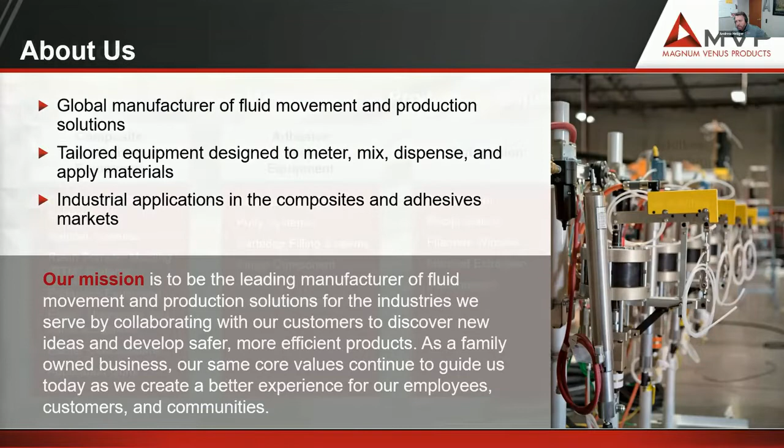Some of the products that we deal with today at MVP are broken up into 4 different sections. We have our composite application equipment, which you'll see with a lot of marine manufacturers and tub and shower manufacturers, where it's choppers and gel coaters where the materials meter mix, and you're having glass deposited out of a chopper and sprayed onto a boat. So we do a lot with that. That's our core part of the business.

And then we have our adhesive and sealant equipment for all types of bonding. And then we have our automation, where we do filament winders, impregnators, automated reciprocator panel lines, to full custom jobs, engineered solutions for customers that we've done quite a few of.

And just in the last 5 years or so, we worked closely with Oak Ridge National Lab in development of a reactive additive manufacturing system, which is printing thermoset materials. Like I said, we've worked with Oak Ridge a lot, and also Polynt Composites a lot. They are actually the material we use today. So a little bit of difference. My coworker Mike likes to always use the analogy of pancakes versus butter.

A little bit of the difference is, as you all know, with thermoplastics, you'll see a lot of those printers out in the field today, but the process with that material is basically you heat up the material to melt it down, you deposit it, and then it cools off and cures, and then if you ever heat it up again, it could go down to a liquid form.

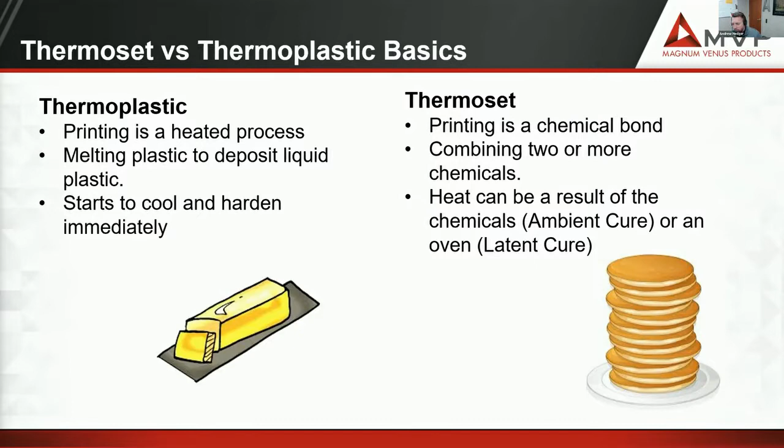I'm not going to go through the whole list here of the benefits we see with RAM, but it's about affordable tool production, a lot of time savings with production and prototyping. A big thing that we like to say is your CAD file is your master mold. You don't really have to build a master mold if you don't need to. You can store your CAD file in your computer, and all you need is a step file to go through the slicer and begin printing.

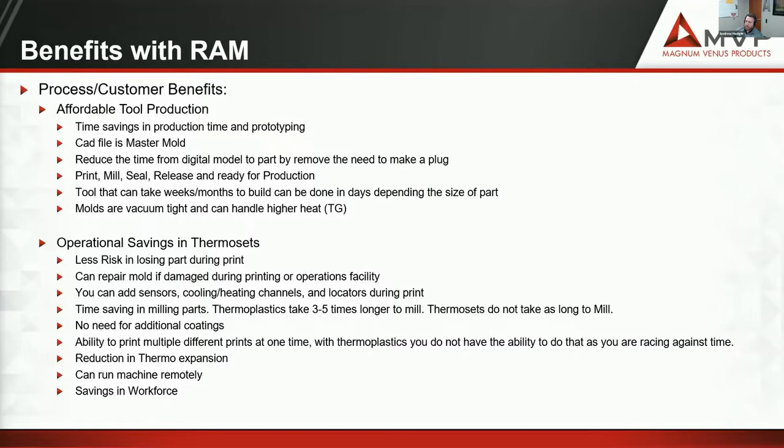Obviously, we're printing, milling, and then not really putting many coatings on, maybe a sealer and a release agent, and then you're ready to rock and roll in production. Some of the operational savings in thermosets is there's less risk in losing your part. We'll get into this a little bit more. It's about the open layer time that you have, because we're printing at room temperature. We're not heating this material up, and we don't have a heated table or a blower on it.

It's all being done at room temperature, and these materials are meter mixing together at the gun head and deposited out. And when they cure, the gel times can range from 15 minutes to 30 minutes. It builds that stability, and we're stacking off of those beads.

So some of the advantages of printing thermosets is, again, the chemical reaction between the two different materials is building a much stronger Z layer strength than you see typically in thermoplastics today, because you're cross-linking these materials, and as they're curing, they're bonding together. There's a reduction in thermal expansion, and some of these materials have isotropic expansion. So depending on what your end use cases are, there's different materials that work for different products.

The biggest flexibility, as you'll see throughout this presentation, is the open layer time. That's probably one of the major advantages to thermoset printing. You have the opportunity to print through previous paths on this machine as well. So you don't have to go bead side by side. You can print through the previous path because it's still in liquid form until it cures.

The thing that's nice too, it's easy to repair. When we print a mold and put it into production, and say a forklift comes by and hits that mold, or we drop something on the mold and it chips, we can use the same material to repair and bond that mold back together and have it back up in production. So it's very easy to repair. It's durable, it lasts a long time, and then we have unrestricted build dimensions.

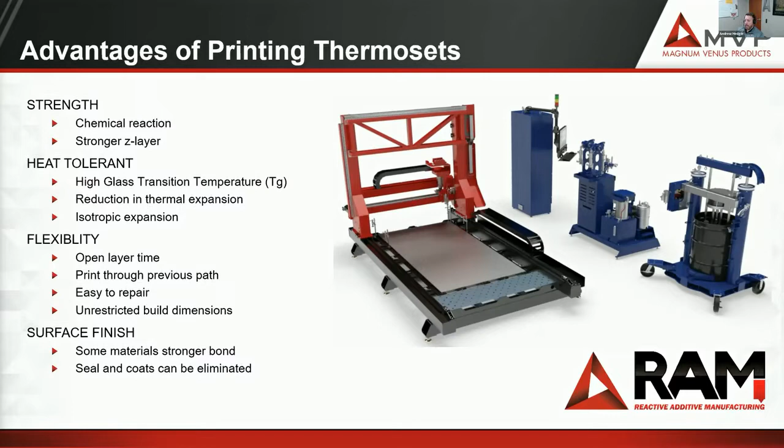Also, for surface finish, we have different nozzle sizes that we go down to, close to 1 millimeter almost, that we're testing on our nozzle sizes for what our print beads could be.

This is a little study that Oak Ridge did with the machine, looking at energy efficiencies. We were one of the most efficient energy machines that they had at the Oak Ridge National Lab. Compared to the floor BAAM and floor FDM systems, we were pretty significantly more energy efficient than all those other machines.

That's because we're not using all those heat sources needed to heat up these materials.

This is our large scale RAM, pictured in your right hand corner. It has a pick and place system on it. We can do secondary bonding, and it has a removable print table. On that machine, the print table is actually moving in a Z direction, and when you need to remove parts, you can remove the whole table or remove it in 4x4 sections.

So a great opportunity here, as you see in this picture, you have 3 different parts that were printed. They were all printed at the same time, and we were able to do that due to the open layer time. So if we wanted to print one mold and pull it out, we could print another one, or print all 3 at the same time.

In thermoplastics, you'll have a tough time doing this because you're racing against that bead you're putting down. Once it starts cooling, you won't get that bonding in the Z direction like you normally get in thermoset printing.

That's something Oak Ridge did. I think there's a table we printed in 3 different sections for one of the shows, but it's just showing you what you could do with that open layer time.

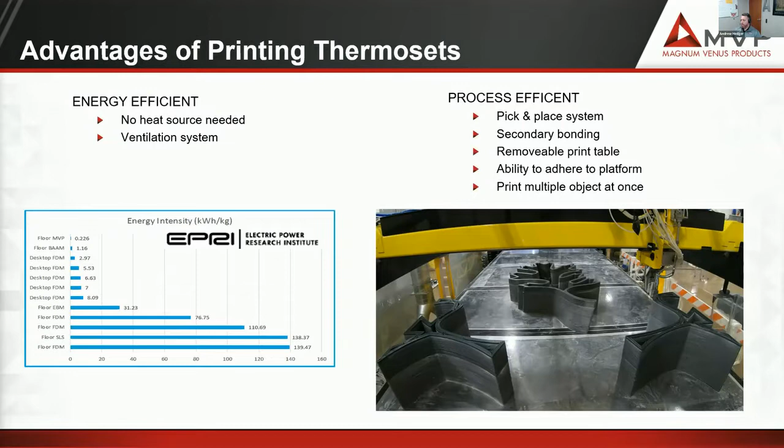These are the 2 different machines we have today. The one on your right is the large scale, 8 by 16 foot with a 3.5 foot print height. That is the machine that's at Oak Ridge today.

And then we have our 4 by 8 machine at our Knoxville facility that we're currently setting up and getting materials pumping through the systems. We actually just recently sold one to Mississippi State, and they'll be working with us in development and also printing parts for customers in the near future. I think we're looking at sometime in February for delivery of that system.

But as you can see, we're seeing a lot more demand going towards the 4 by 8 size with the 4 foot height print, because it's scalable, like I said, in those sections lengthwise. And it's a little easier to access because the table isn't moving up and down. We can take the table and remove it, put a pallet or a different type of table, wood, carbon fiber, or aluminum, and print on that, so we can mount different types of sources to print on top of.

We use a Siemens control package on this machine as well, and we use open slicing software to transfer our CAD files into print files.

Like I said, we have a great partnership with Polynt Composites, who we've been working with tremendously through this whole process over the last 5 years. We actually started with one general purpose PRD 1520 material, and they're now offering more materials.

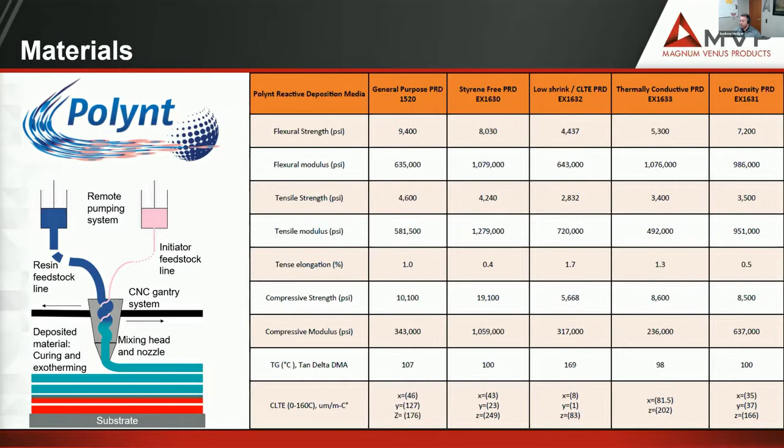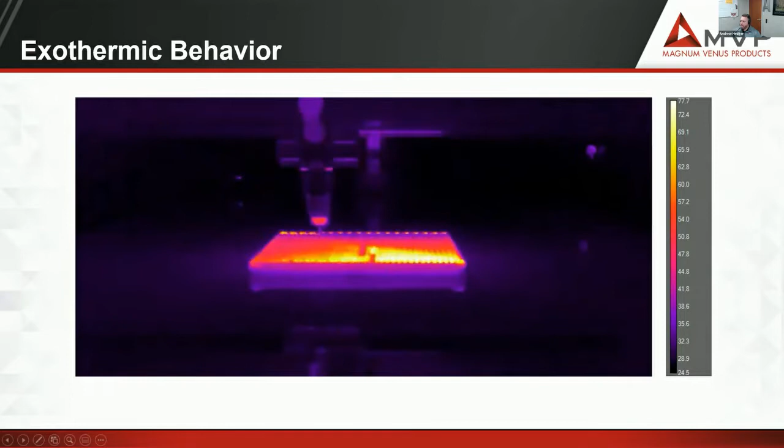I think this is actually a kayak mold, a paddle mold that we printed here, if I'm correct. It was at the CAMX show a couple of years ago. So it's pretty cool seeing how the heat follows up the print layers. I think about 5 to 7 layers down is when you're tapping into the materials and it starts curing.

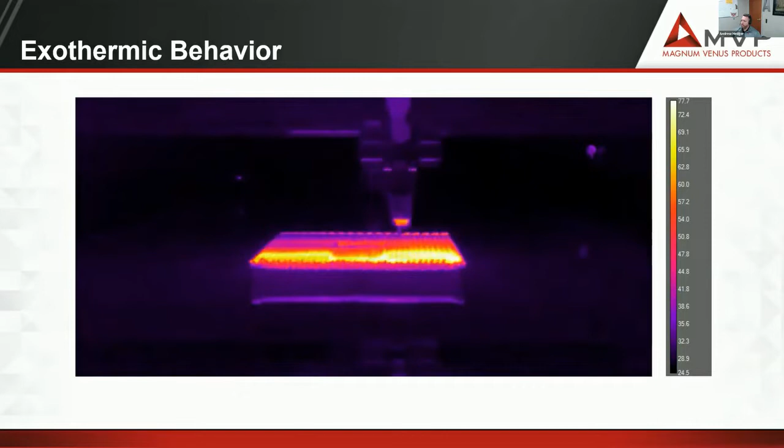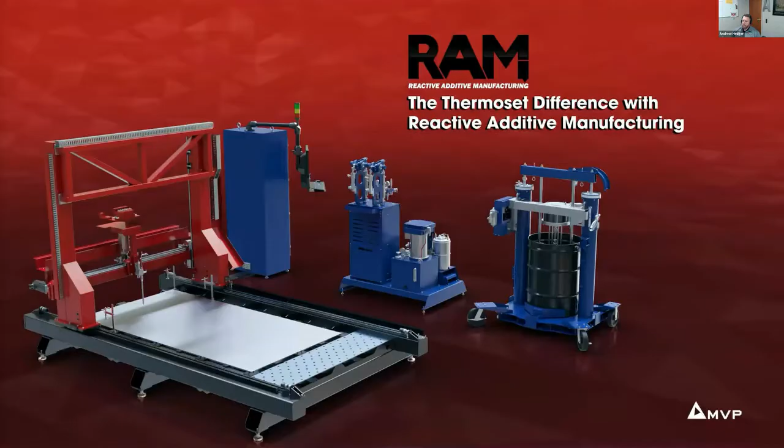And this is another video. You're not going to hear any sound on this - I had technical difficulties trying to get the sound to play through - but this is our RAM system. We launched this video at CAMX. This is a small scale 4 by 8, and you'll see on this the print through that happens, and the pick and place that you could do.

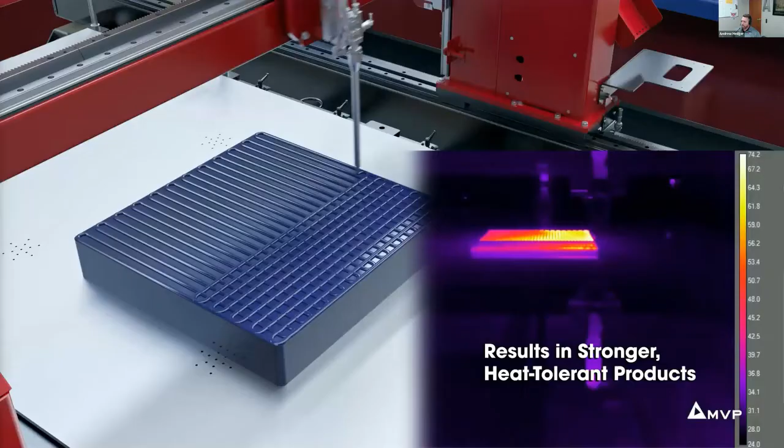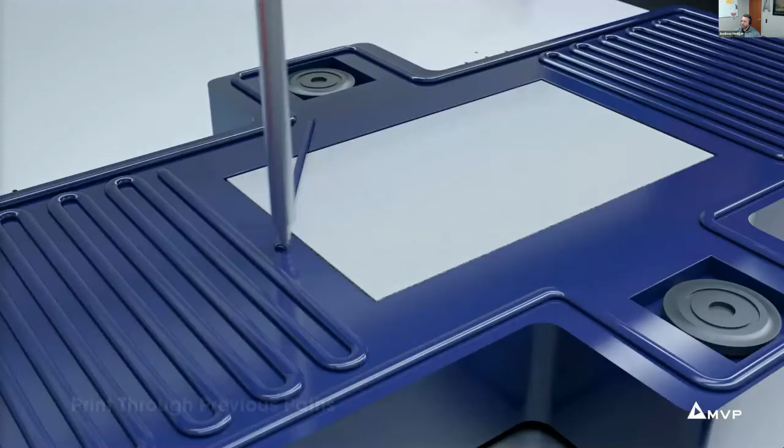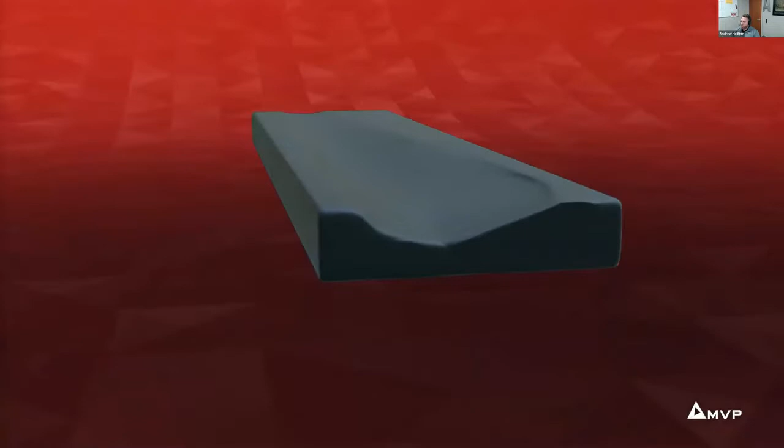And that's what we're showing with the print through on that previous video. So on that video you got to see the print through, and then the benefits of thermosets, which is how you could print molds in different sections and bond them together because it is a thermoset material. You just use the same print material to bond these together, as you'll see in another slide down the road in this presentation, how we actually took two pieces and bonded them together to get a 90-degree flange on one of the tools we did.

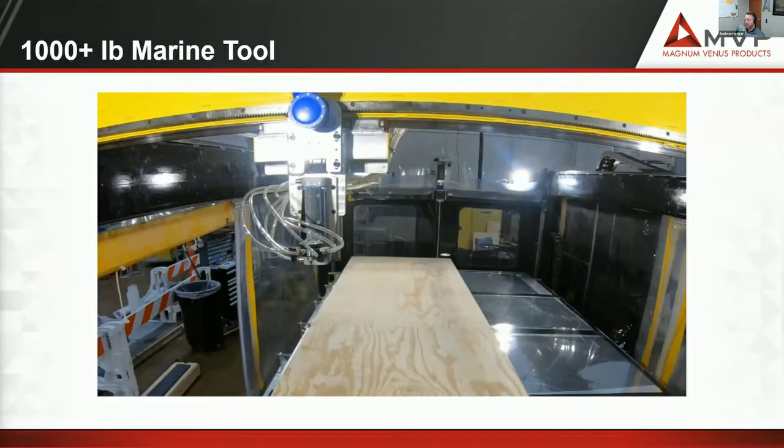This tool here that I'm going to show a video of was one of the first large tools that we printed. It's over 1,000 pounds and is used for carbon fiber infusion for a marine part. So this is pretty impressive.

As I said before, we don't have to actually print on the table. We actually built a wood platform here, a pallet that we printed on, so we're able to ship the mold on it. As you see at the end of this too, we actually put areas in there so we can index the mold when we bring this to milling, and we can locate the mold precisely to make it a faster process when setting the mill up.

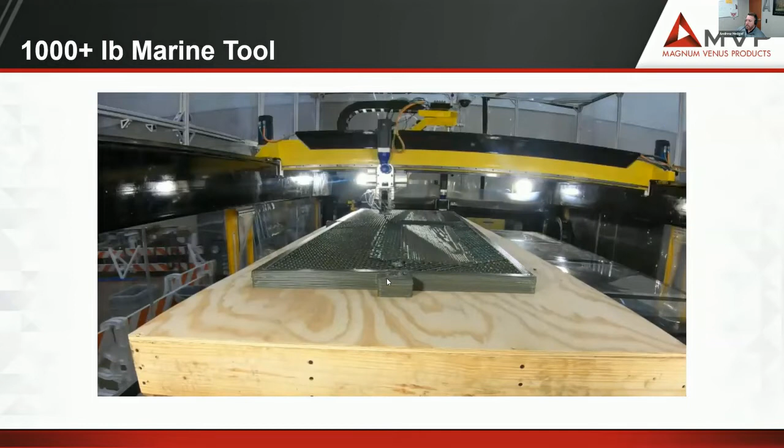What's really unique about this print is, I think it was over a year ago that we did this. The unique thing is we were doing an R&D and there were a couple shutdowns, and we had actually stopped running the machine for about a week. So we didn't even get through the whole print - we printed maybe a quarter of it, and then a facility, they came back a week later and were able to start printing right back up on top of this mold, and the bond was perfect. So we literally left for 5 days, came back, printed back on, and had no issues with the mold.

And that's the big thing about the open layer time. I mean, we really don't know how long that time is, but we went multiple days without printing on top of it, came back, printed, bonded perfectly, and had a successful tool. So that's a huge advantage.

So if you have an operator, say you start a print, you don't have to sit there for 24 hours printing this part. You can actually do it in 4-hour segments, 8-hour segments, so you don't have someone staying through the night - you don't have to be concerned with that. If you do want to run it for that amount of time in a row, you can do that as well.

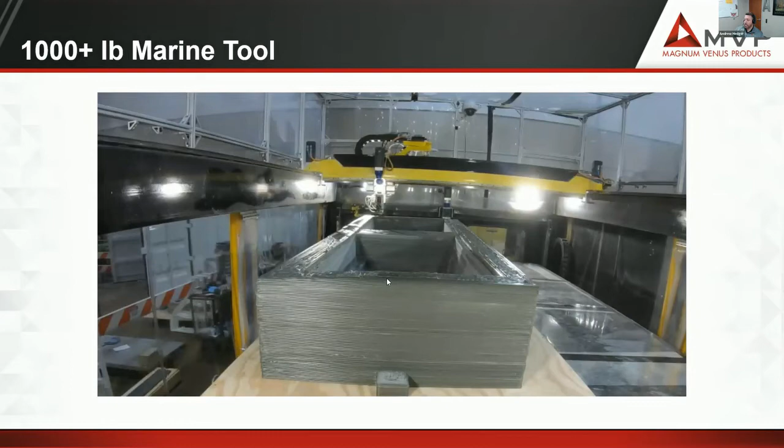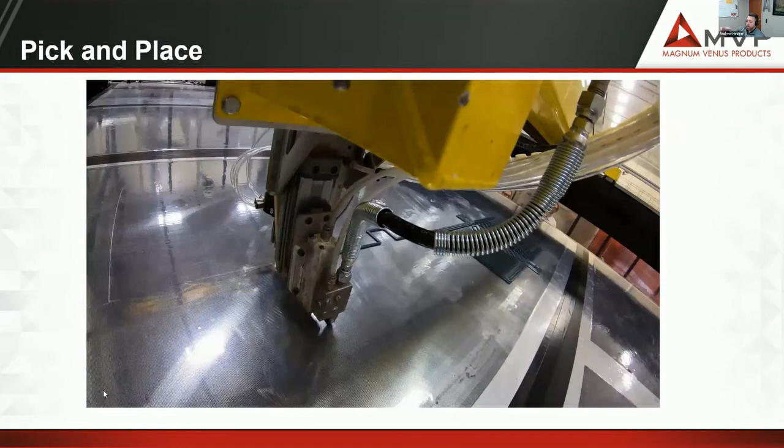So this is a little bit about the pick and place, which is unique too, again due to the open layer time. When we're printing, say you want to put sensors or vacuum channels into your mold, you could do that just by pausing the print, putting your locators on, putting your pick and place on, dropping sensors in, heating and cooling channels in, or even foam pieces to lightweight your product, as you'll see here.

So what they're doing here is they're changing the head on the machine. It's going to pick up the pick and place head and put in a couple locators on the outside there. It's going to go change its head again after this, and I believe pick up a foam piece and put it in the middle. This is the Polynt PRD material that we're actually printing with here.

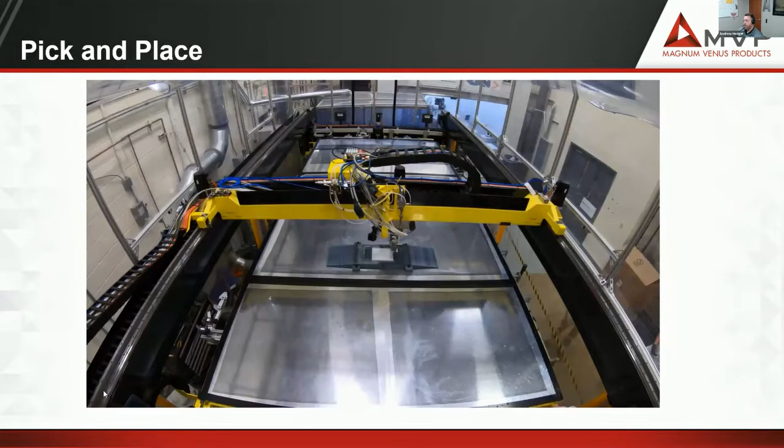This is pretty cool, what Oak Ridge was able to do with this print, and pick and place, and how they worked with it. And you see there, that's printing through previous layers.

To show some of the end products we've actually done—I was talking about printing parts in different sections—on the left side is actually a mold for an RV company. You can see it's almost a wheel, like the outside part that goes over a wheel flange. We printed this mold, and we printed that flange separately. Then we were able to bond that flange to the top of the mold with the same material we printed with, and then machine and finish the mold and send it off to the customer. It was nice to see that we got that 90-degree angle, and that's really due to the open layer time and how we could bond these materials together.

That's a great benefit of being able to do that and actually lightweight the product—taking out material instead of building it all the way up to that height to reach the flange and having a solid flange. The mold on the right is a mold that Oak Ridge decided to print.

This was a pre-preg material used on the compression mold, for things like gas caps. You can see there was no release agent or sealer put on—it was printed, milled, and then ready for production. It's pretty cool seeing that mold. We showcased it at the CAMX show this past year, and we have it here at the facility. But it just shows what you could do in different processes—vacuum infusion, compression molding, thermoforming, whatever it is—you could use this tooling for many different types of processes.

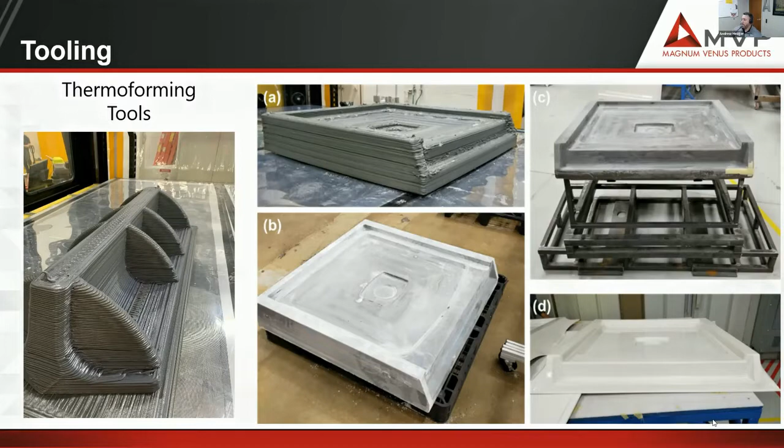A lot of times people will see this. A big difference in the thermosets and thermoplastics is our print time may be a little bit longer than what it takes to print a thermoplastic part, but our milling time is cut in half. So that print up in the left-hand corner took about 70 hours to print. It only took 24 hours to mill. Because when we're milling, we're not worried about that heat and temperature so much impacting the material. On thermoplastics, you have to go slower because that heat could deflect the materials and make them melt down. So when we're machining this thermoset, we don't have to be concerned with that. Your machining time is a lot faster on thermosets than you'll see with thermoplastics.

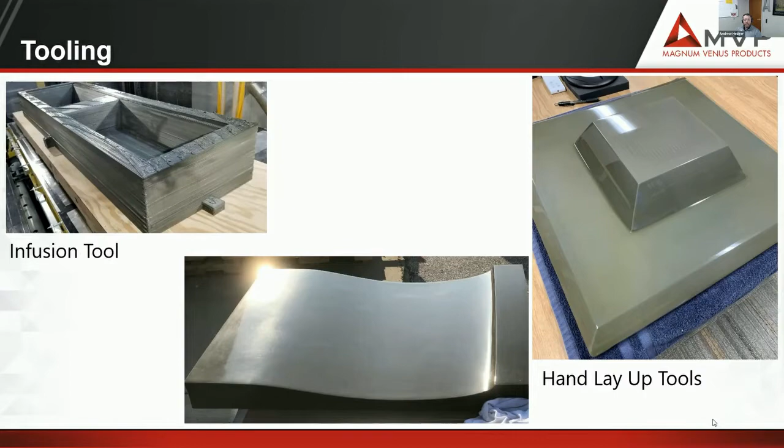So that's basically what I have for the slides today. We did have a launch of the Ram 4x8 this year. It's at our facility in Knoxville, Tennessee. We also have the 16x8 machine at Oak Ridge that they've been a great partner with us in helping develop this. And Polynt Materials has been a great partner as well on the materials they offer for the thermoset printer.

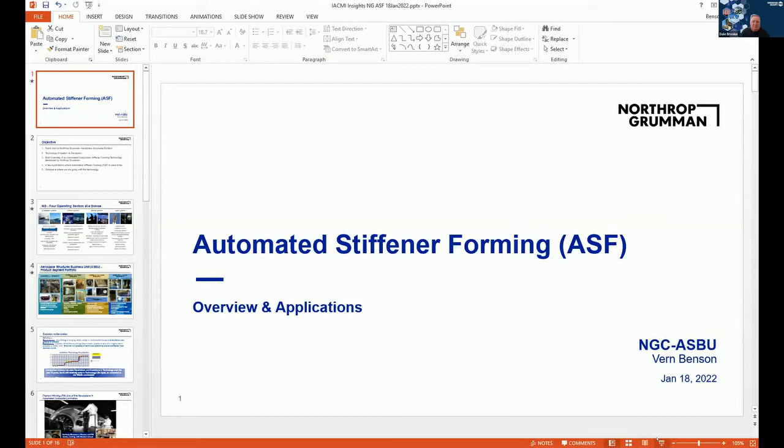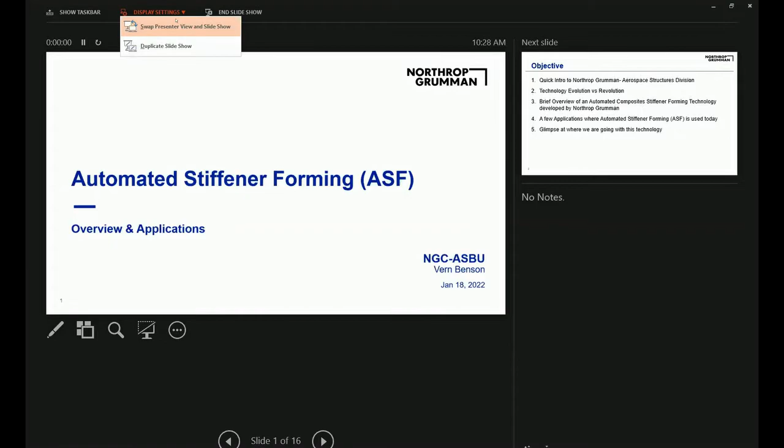You just need to put it in the slideshow mode, and we'll be ready to go. Okay, does that show up okay? Yeah, you need to do your swap as you did before under display settings. Okay. That work? Perfect. Yep, we're good. Okay, I appreciate it. Let me jump to the next slide here.

I'm just going to give a quick intro of Northrop Grumman, our Aerospace Structures division, talk to you a little bit about evolution versus revolution in the technology area, and then give you a brief overview of an automated composite stiffener forming technology that we think is revolutionary. Then I'll talk about a few applications that we are using that in today, and a little glimpse of where we're going with it in the future.

So, as part of Northrop Grumman, we got purchased by Northrop Grumman. We're formerly Hercules, and then ATK, Orbital ATK, now part of Northrop. We are part of the Aeronautics Systems group. Aerospace Structures is what we are. They also have a Defense, Mission Systems, and Space Systems group as well.

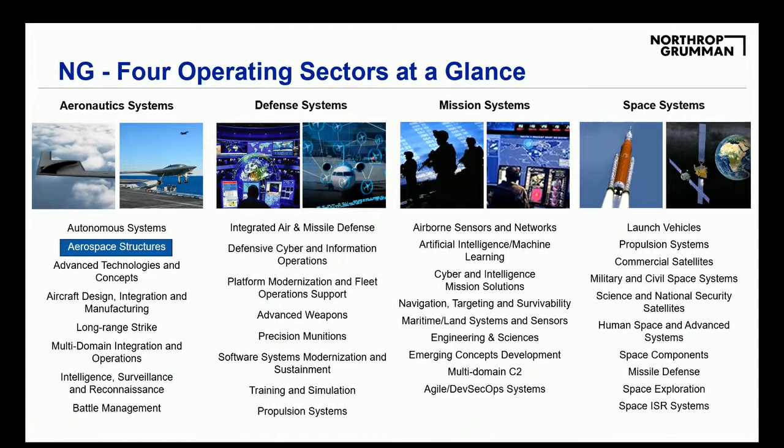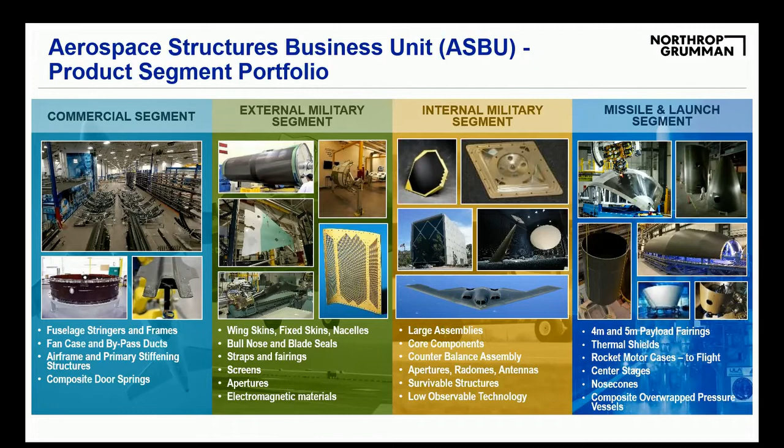Our Aerospace Structures business unit, as we're called, we are a merchant supplier of composite structures to the industry. So we do have a commercial segment where we supply products to commercial aircraft and other commercial ventures. We do have external military customers where we supply composite products to even competitors to Northrop, other companies. And then we have our internal Northrop work that we do in the military area. There's also a missiles and launch segment. We're primarily involved, our group now, in the launch part of the business.

So just real quick, evolution versus revolution. Every so often in the industry there's a major breakthrough where you make a fundamental change in how we make product or process. More often it's the evolutionary change where we're continuously improving things we've developed. I've had the privilege of being involved in a lot of evolution, but also a few revolutionary steps where we've made a significant impact on the industry.

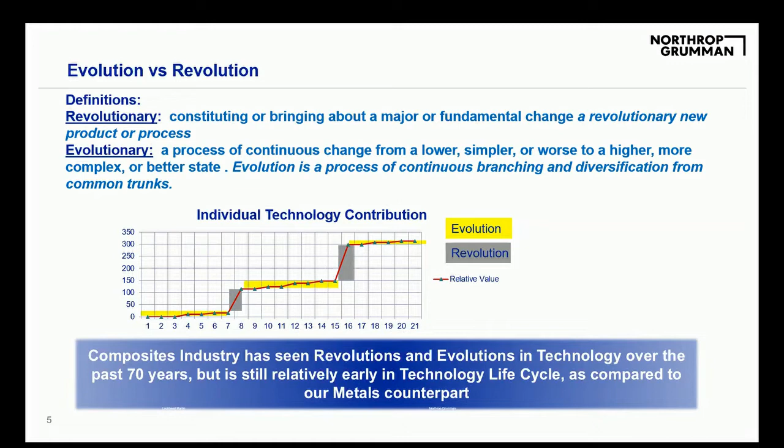So I'm just going to touch on a couple of those, and then we'll get into the stiffener forming.

My early career was involved with filament winding, which I think is one of the first revolutions in composites automation—the ability to automatically put down material to do rocket motor cases and large cylinders, things of that nature. We've been very involved in that from early on.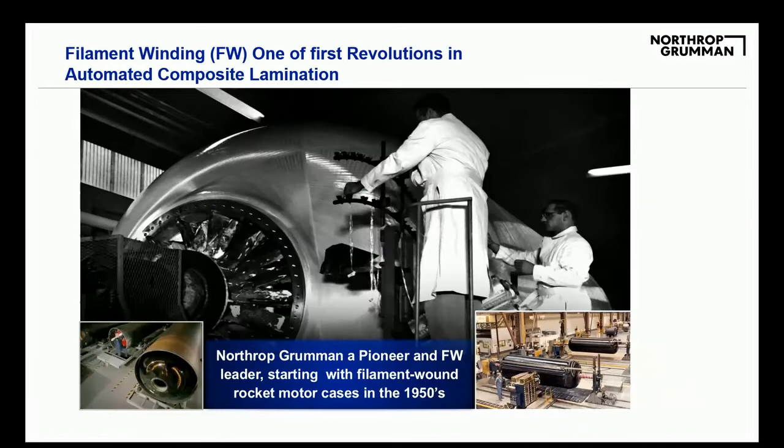The other one was automated tape laying, going from hand layup to a system that could put down wide layers of pre-preg tape. That was pioneered early on by LTV and Vought, and later Cincinnati Milacron and Ingersoll. We do incorporate ATLs in a couple of aspects of our factory automation today.

But the big one for me was involvement in trying to get a system that could handle more complex geometry. So automated fiber placement, to me, was a revolutionary impact on our composites lamination industry, and I had the privilege of being involved with the development of the first fiber placement machine and ongoing machines, and then involvement with Cincinnati Milacron.

We have a large dockable gantry system, this one in the middle here, that can do both tape laying and ATL, AFP. And today there are major improvements—this is a large machine with Ingersoll, and you see a machine here with Electroimpact, which really pioneered the dockable heads to go with the machines, and then the industry kind of followed that as an evolutionary step.

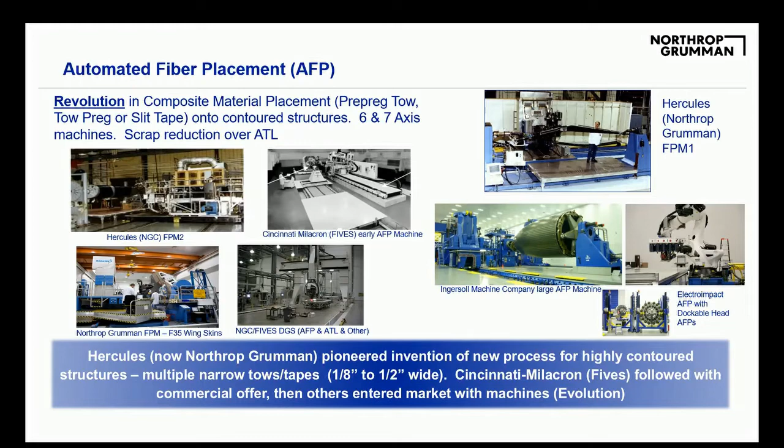So the one we're going to talk about, the main topic of the pitch today, was automated stiffener forming. We call it ASF—a new automation technology that we brought online here several years ago. That's the ability to make small detailed parts in an automated fashion, and that was a technology that was lacking.

We could do large acreage structures with automated tape laying, automated fiber placement, automated filament winding, but to do these smaller detailed parts with any kind of automation was lacking. So we took on this challenge several years ago and developed what we call an automated stiffener forming process.

We started out making stringers—long stringers that turned out to be fairly complex with pitch, yaw, roll configuration to them. We evolved that technology into also building frames, curved frames that go into an aircraft fuselage, for example.

And then we also evolved that further to do automated forming of engine cases with integral turned-up composite flanges. So that's an example of going from a revolutionary technology and evolving into other areas with similar technologies.

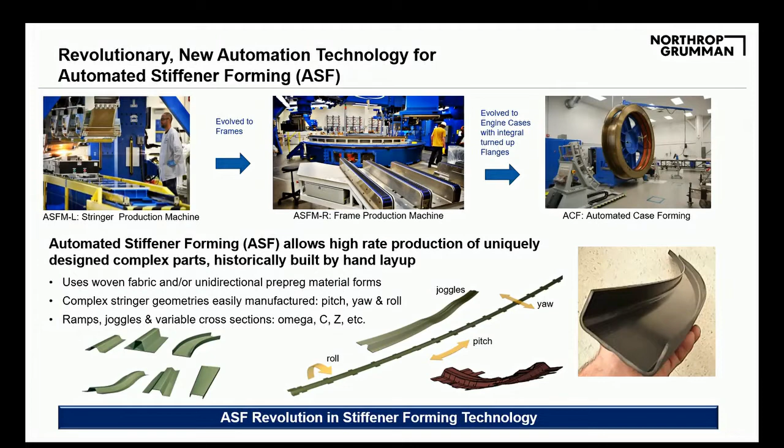So real quick, this is the basics of our automated stiffener forming process. We have a supply head where material is spooled up. It's a continuous roll of material, but it already has the angle orientation established on it to be put down on the stringer—so it might be a roll of plus 45-degree material or a roll of 90-degree material.

We have a separate process that develops those continuous rolls of off-angle material, and then the material comes off the spool. This is the example of an Omega or hat stiffener. The material comes off the spool, gets tacked onto the cap of the Omega, and gets compacted across the cap.

This is like a train of forming systems all together that move as a unit, which we call the forming head. The material comes down, gets tacked, gets formed over the upper radii and down the web wall, and then rollers come along and compact it along the web wall. Another set of rollers comes behind and compacts it into the female radius, and then a combination of squeegees and flanges smooths the material out and compacts it onto the flanges.

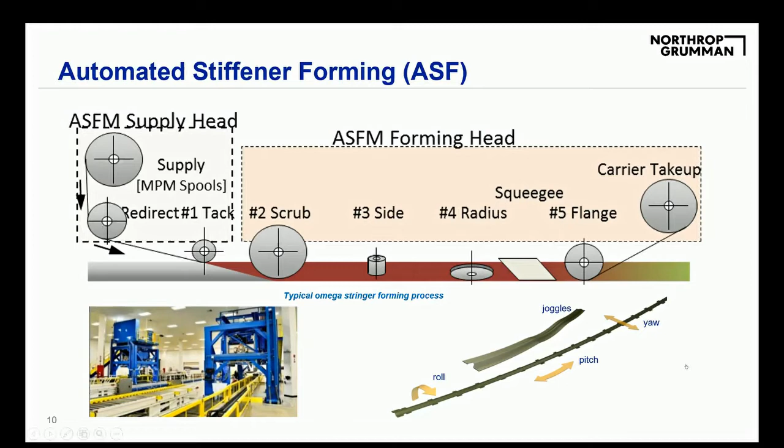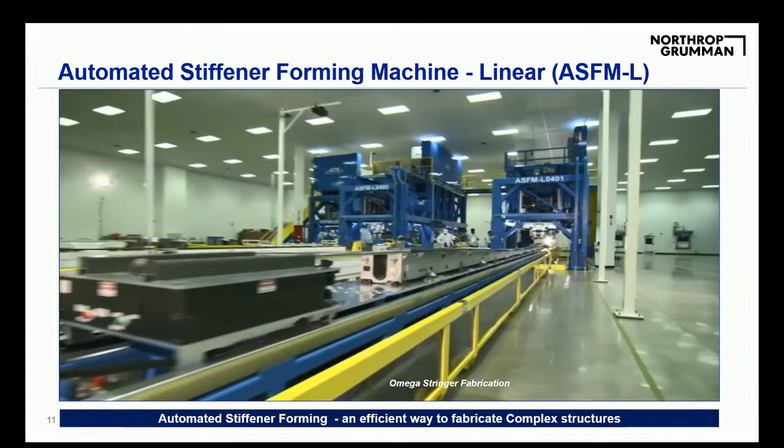And this is an example of one of the larger production machines. In this case, we hold the delivery head, forming head fixed, and we actually move the tool underneath the system. We have another machine that does it the opposite way, that the carriage and the forming systems move. This is an example of this train of individual roller elements that are going along and forming, compacting the material down the length of a stringer.

So that gives you a quick idea what we call our linear machine that makes long, complex stringers for stiffening wing skins, fuselages, things like that. As I mentioned before, we evolved that also into making curved or frame type components. And you'll see here in the lower left-hand corner, we have multiple heads that hold different orientations of material. The robot picks it up and actually places that onto the machine itself.

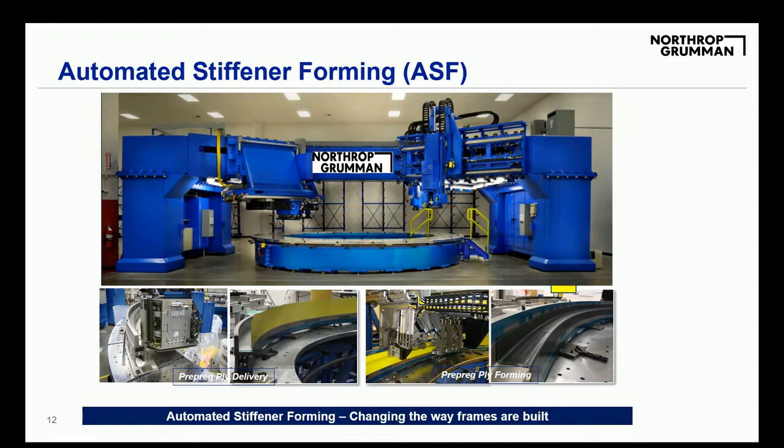And the machine places the material usually on one flange of one face of the frame, and then the forming segments come around and form it across the web and up the back flange to get a Z stiffener or a Z frame, as you see here. So it's again an automated placement and automated forming system to get these kind of structures.

So examples of application on the Airbus A350 aircraft, commercial aircraft. We make stringers and frames in production for them right now. We make about 60% of the frames in the fuselage and pretty much 100% of the stringers that stiffen the fuselage section. So there's over 684 parts per ship set. It's actually gone up as we've added the Dash 1000 component to it. That's actually a little higher. But we, again, we do stringers and frames for those aircraft.

And at full rate, at a 12 aircraft a month rate, we're making about 25 miles or 40 kilometers worth of stringers, stiffeners per month, going through this equipment. So that gives you an idea of the capability and the volume involved with that.

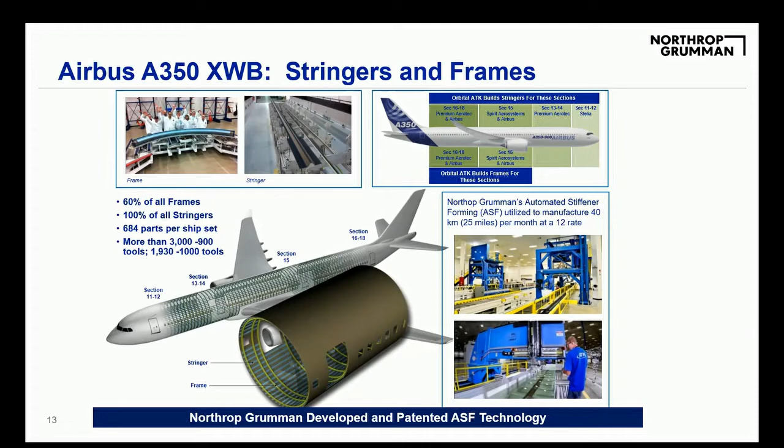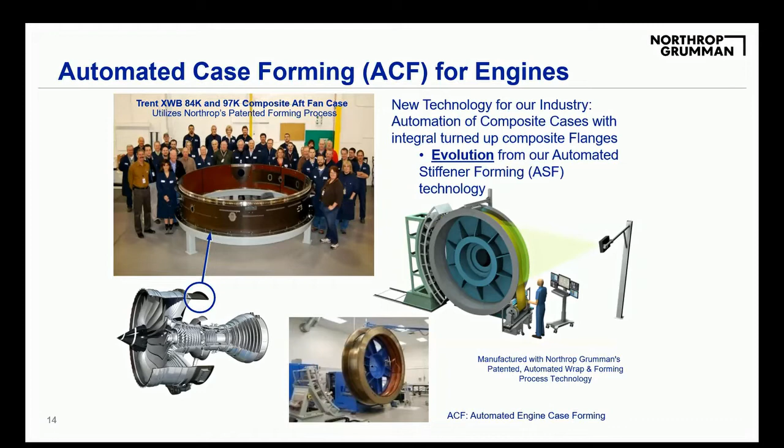So, and I mentioned also the case forming. So we also make engine cases. This is an example of the rear case on a Rolls-Royce engine, made out of composites with integral turned up flanges. We have a couple of different programs. Again, this is an evolution from our automated stiffener forming technology, using similar progressive roll forming process to create these complex shapes in a very efficient manner.

And then just to give a quick idea where we're going, most of the production work is done with thermoset materials in the last few years, and we have now evolved the technology for doing dry fiber formats and creating dry fiber preforms to be used with resin infusion type processes.

So we're using different kinds of dry material formats, dry wovens, dry NCFs, Hi-Tapes, braids, and even some commingled material. So there's a lot of players introducing materials into this arena, and we are adapting those materials with our automated stiffener forming processes. This is an example of an Omega stiffener. This happens to be done rather than forming it onto a male tool, we're forming it into a female in this case, per the request of our customer.

And it shows the ability to place, form, create a consolidated preform that then gets taken and interfaced with the skin, and then the whole thing gets co-infused together as a co-infused and cured stiffened skin and stringer structure. So anyway, we're working that area, also working a little bit in the thermoplastic area. So these are some examples of things we're doing in the automation of composite stiffeners. These are all highly reinforced carbon epoxy in general structures that we're developing and introducing to the industry.

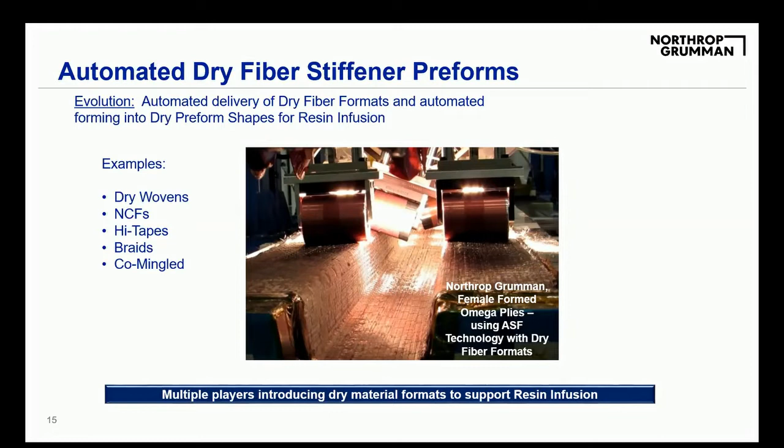So with that, I'll leave it at that. We can take a question or two if there's time, or we can move on to the other presentation.

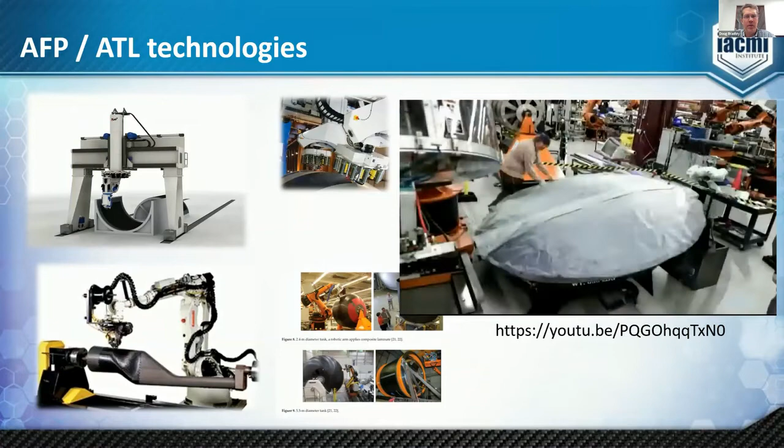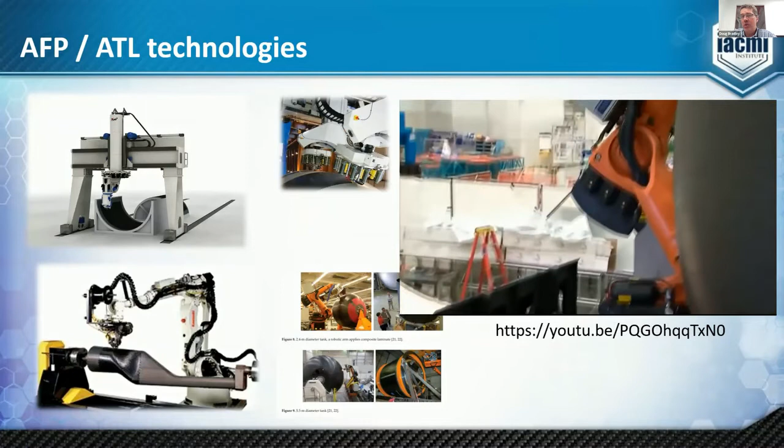And so when I think of ATL, AFP type technologies, the technology came out in the mid-'80s. Vern's a leader in this technology, but from an automotive perspective, if I could get one fiber placed article off in 24 hours, that's great for aerospace, but that doesn't work from an automotive perspective. The other thing that doesn't really work is if I have to use a lot of consumables like bagging materials or separator films, that really hits my cost from a part perspective. So I want to try to minimize that and avoid it.

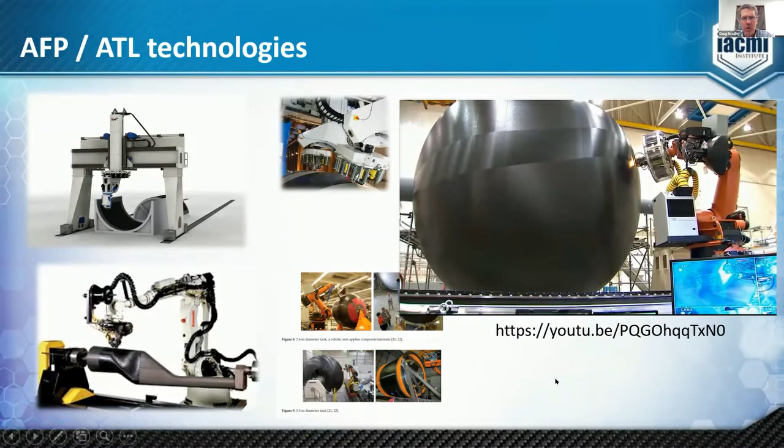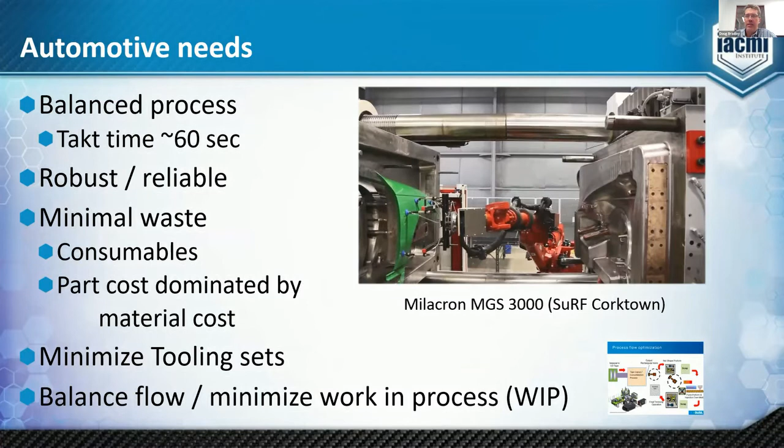So if I go to the next slide, from an automotive needs, the drivers and what automotive processes really look for is having a balanced process, and I'll talk more about that, but also fast cycle time. So I need to get out a part. If I can hit a part every minute, then I can support off one set of tooling roughly around 85 to 100,000 units a year.

And the other thing, I need that process to be very robust and reliable. So it can't rely on an operator with either a placement of a thing, a touch. It's got to be from a very wide process window. So I can move side to side in that window, but I still get a good quality part out. The minimal waste, I talked a little about minimizing the consumables.

At the time I was at Plasan, I think we were spending over $1 million on just bagging material alone every year. The part cost, when you start looking at bidding on a project and quoting on a cost, it's largely dominated by my material cost. So if I can minimize my scrap, place fiber exactly where I need it and not have over trim, off fall that gets thrown away, that really kills your cost.

The other thing is, from an automotive need, minimize tool sets. And that does two things. One, it's less tooling investment, but also if I have 20 sets of tooling to give me my volume every year, I might have parts stuck on those tools. If I have a problem in the process or scaling it up, then I've got a lot of work in process and a lot of scrap rate.

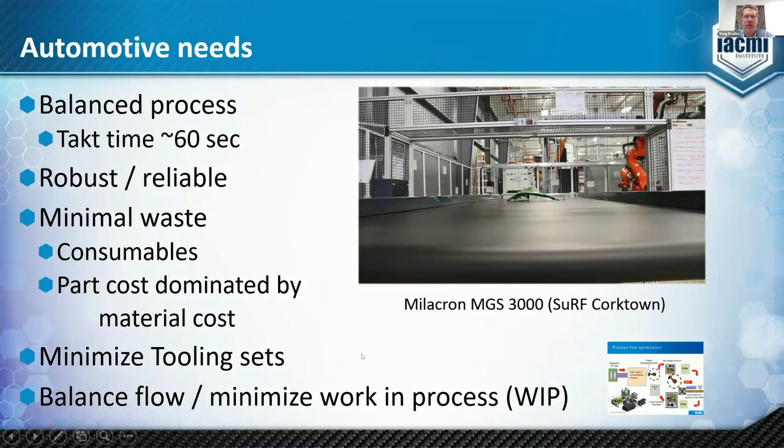I'm going to go to the next slide and talk about flow rate. So that flow rate, the ideal automotive is you're bringing material in, and I borrowed a chart from some joint work we did with Dura on a seat back. So this is their chart, but it illustrates the point. I'd like to see material coming in, and hopefully you can see my mouse in the top left corner. Material coming in the plant on one side, flowing to an operation like a tape layup operation, robotically moved over. So I don't have 100 parts between that tape layup operation and the next, if it's a net forming operation or a drilling operation, whatever.

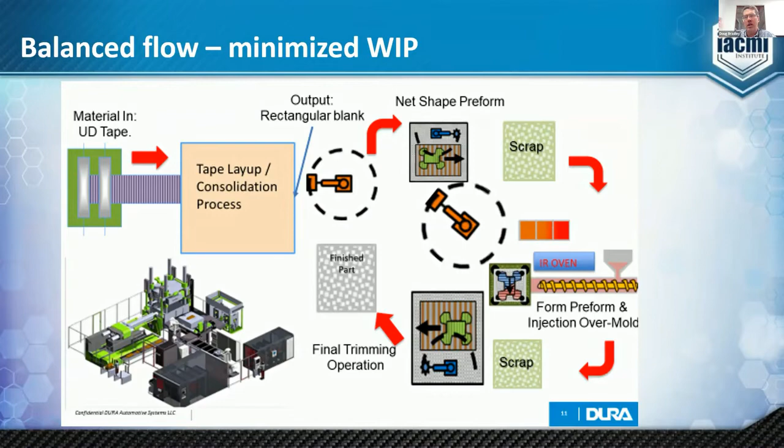I want to see nice flow, start in one corner, move around my plant, and then go out the shipping door, and no parts in between. That's the ideal. It doesn't mean you can always do it, but that's the goal. And so it minimizes any problem I might have. I catch it right away. There's feedback into the last operation and just better flow. So that's an automotive requirement.

The previous project team was really a very good working thing. We all came to the table, we had expertise, level set, everybody had an equal weight in things, between the industry partners: Ford, Dura was the tier one, and BASF was the material supplier. And we went through and established a criteria for the tape laying technology from an automotive perspective.

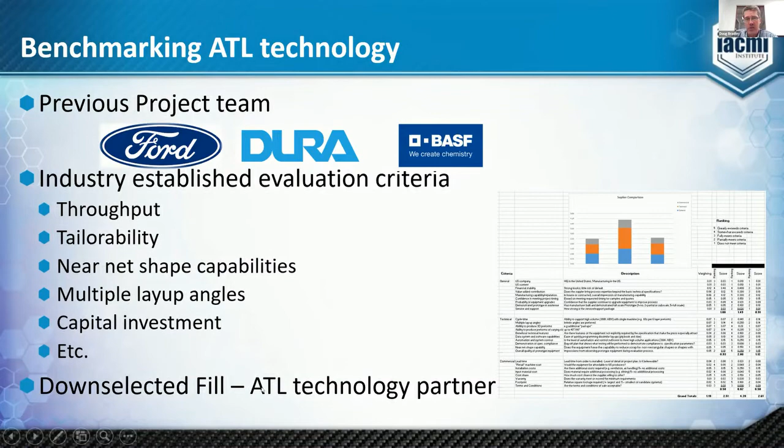These are just a few sample things out of the weighting criteria, but throughput came to the top, tailorability for different blank shapes and sizes, near net shape, minimizing the waste, the ability to do any or multiple layup angles, and then the amount of capital investment it would take for the throughput you got out of that machine. So all those were boiled down into a criteria matrix weighted by the industry partners, and the decision matrix that came out of it was down selecting a Fill technology. Fill's a company in Austria, and that walks me right into this.

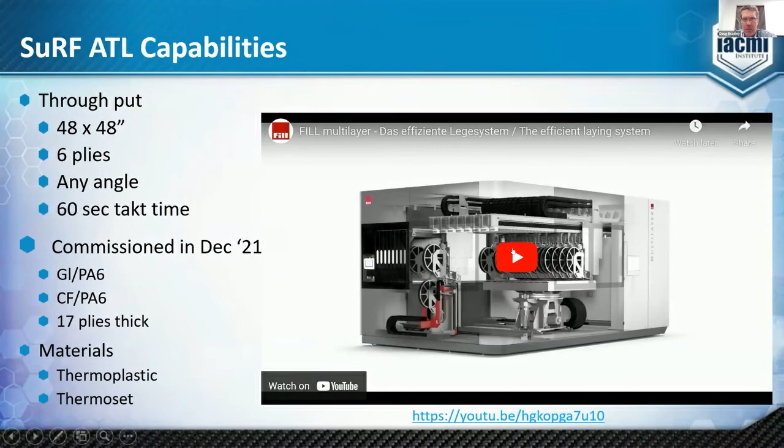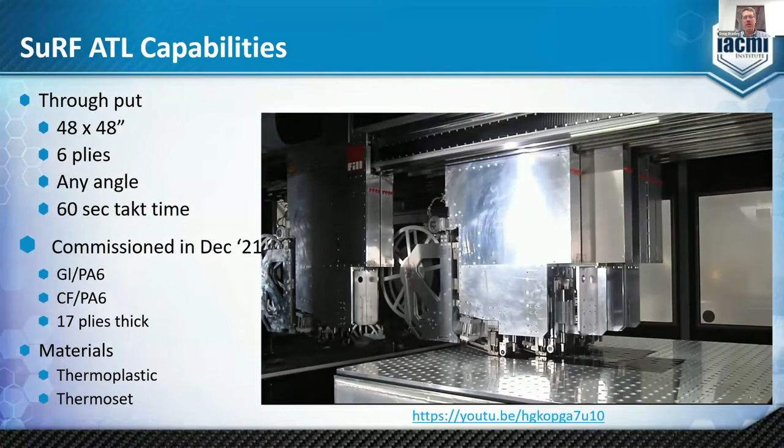So I'll roll through this video and talk at the same time. I'll let that spool up a little bit. The video is going to show the multi-layer capability. This is the machine that we down selected. This isn't the exact machine. Ours has 12 heads. You can get up to 16 on this machine. But the throughput requirements we built in were, we wanted this to make a 48 by 48 inch blank, do 6 plies, any angle, and it had to do it in a minute.

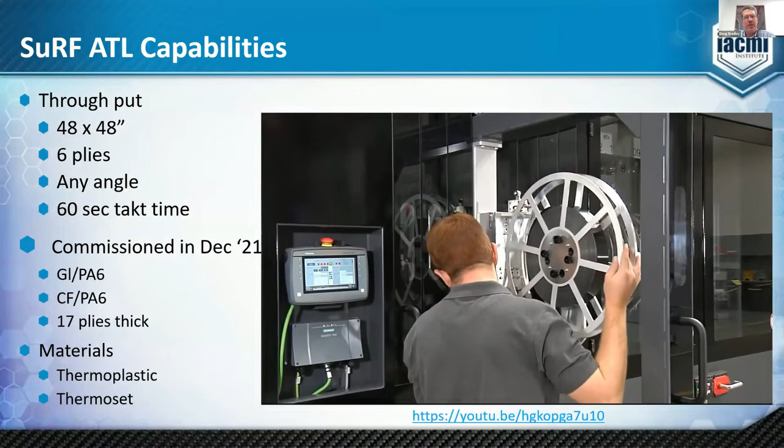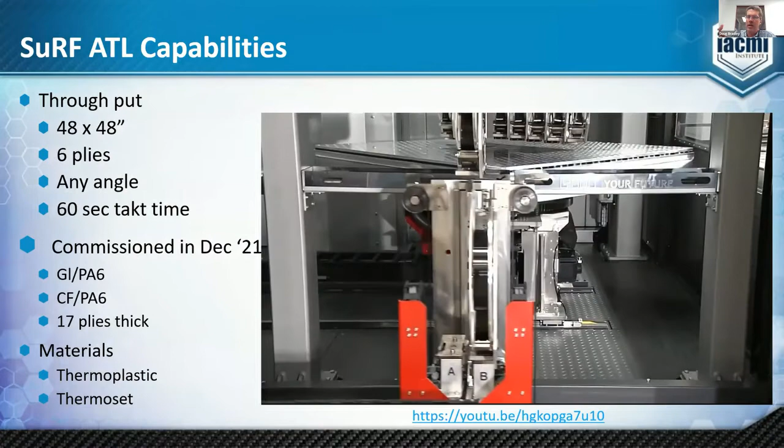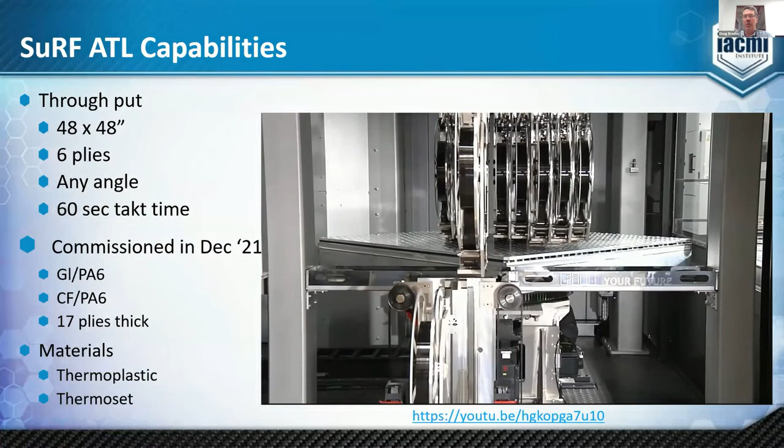And so the spools you're seeing here, as the machine's running, you could load a new spool, push it in, and it'll automatically load and swap out. It notifies you if it runs out and comes over and swaps it out. The traditional tape laying technologies that I showed earlier, those you have to pause and change out. I think they've added some capability to do that automatically, but this is a lot faster.

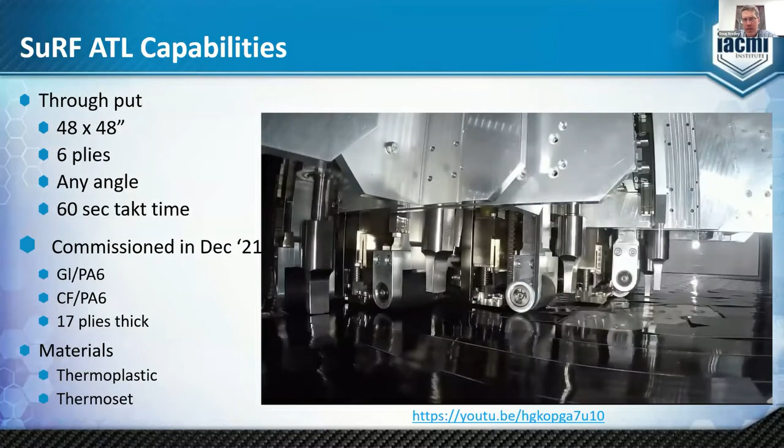We commissioned this machine last December. We ran glass PA6 and carbon fiber PA6, pushed on a lot of different geometries, and different angles, doing splices, went up to 17 plies thick, and they're ultrasonically staked.

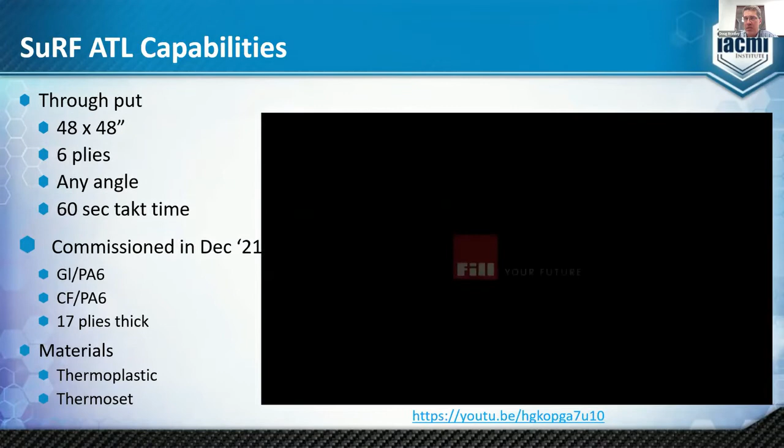The machine will do thermoplastic and thermoset. And as Dale said, it will also do dry, but you just have to have the right binder material in the machine to do that, and we haven't pushed on that yet. Most of the work done to date has been in the thermoplastic realm.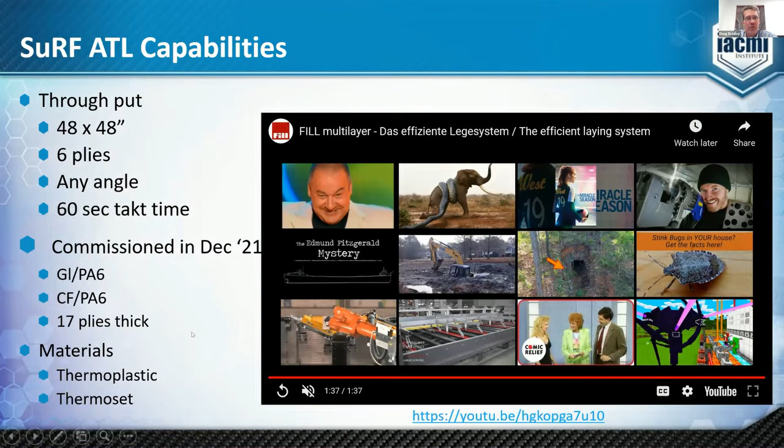So if I look at the flow for this rapid ATL process, what we've demonstrated here, you walk through at the top right. I start out with material tape, 50 millimeters wide on a spool, and load that in the machine. From there, the ATL generates the shape of your preform, what you want that to look like. Here, this is just one we used for commissioning. It has a serpentine pattern on the right, and I cut a window out of the center of it.

And then for tape placement, you tell it what angles, and it'll automatically generate ultrasonic stake points. If you don't like them, you can move it or specify them at a different interval. This is the generated preform out of it—a non-consolidated preform, just tacked together with ultrasonic stakes.

And then from there, depending on how this is one process, you could consolidate that in a tool if you wanted to with some shape. We did it with a double belt press, and then got a big laminate that I don't remember.

This one, we did two different thicknesses for this application—one was 2 millimeter thick, one was 3.5. This shape here is a 3.5 millimeter blank, but you water jet them out. Then you've got an insert that could be placed into certain areas and over molded with another material, so an injection molding process.

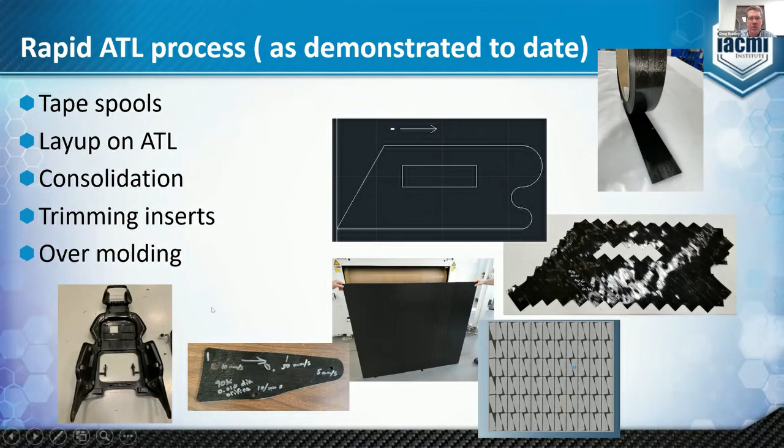Other type processes, you do a tweak on that. You could take the ATL preform and then form it. We did this for the project with Ford Endura, where we formed it in some rapid prototype tools into a 3D shape, then secondary drill these. The light green inserts are where you see them in the application—there's a dog bone here in the seat pan, and there's 2 dog ears in the seat back. That's a bonded assembly.

But if you take a look at the cross section through the laminate, it's not quite up to aerospace standards in my opinion, but from a big acreage, automotive could live with that all day long. Not too many voids, resin-rich areas look pretty good. This was just a rough trim we did here in the lab, but we're pretty encouraged by it.

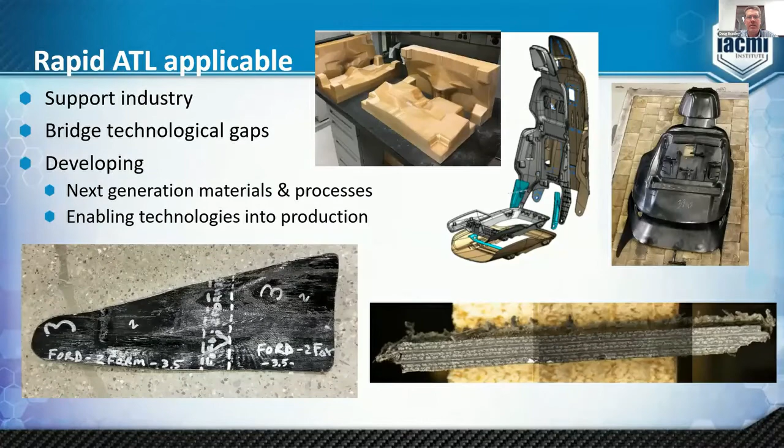I'm going to go into this next slide and just back up and give you an overview of our facility, where we're located. It's in the Corktown area. We've got about 50,000 square feet of space, and everything in our building has been put in place based on industry pull—if there's a need or a gap, we either helped down select it or they requested us to put it in.

All the personnel in our building have an industry background, about a combined 120 years of experience in composite material areas. The type of projects we do are for prototype development, run-at-rate validations, scaling up technology before it goes into an automotive plant, where it's difficult to break into production to try some things. Sometimes you want to run under the radar to prove out your process, or leave something set up here without having to worry about tear down and reset.

This whole facility was established with funding from MEDC, Oak Ridge, Department of Energy, and MSU just manages the contract.

Other processes we have here at this facility: a Schuler press—I'll go into this in the next slides—a 4,000 ton Schuler press for large part development. This is an injection molding machine, which did those seat backs that were shown in the chart. We also have a pre-preg line here, and we've got various different tooling sets.

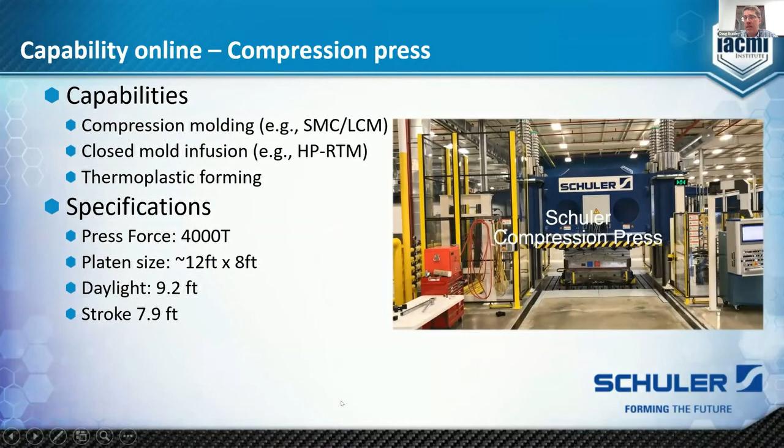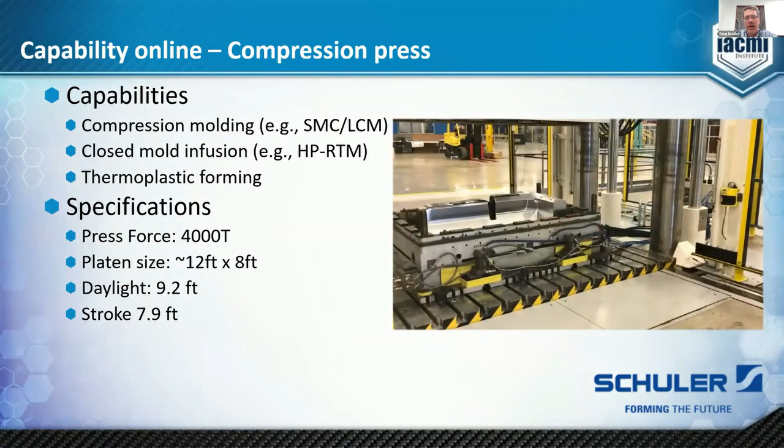From a compression press capability standpoint, it can be used to consolidate ATL blanks, could be used for SMC, liquid compression molding. We've done some of that here as well as high pressure RTM. Different than RTM, this high pressure process involves injecting hundreds of bar into your cavity, very high, around 1500 PSI. The press is also used for thermoplastic forming.

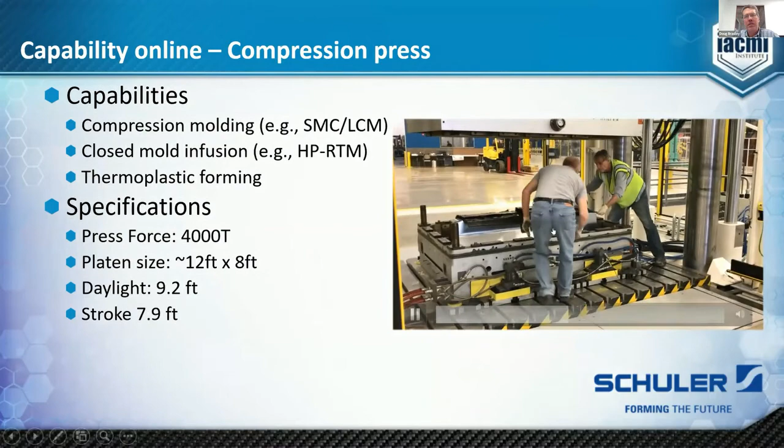We have an injection molding cell. It's a Milacron, and this is a seat back tool that was used to generate some of the parts in the previous slides. It's a 3,000 ton machine. This tool happens to be a dual cavity. Here's your shot sizes, so it's got a range. We've got a couple different barrels too that you can swap out. Typical processing temperatures right now we can run up to about 550 to 600 F, somewhere in that range.

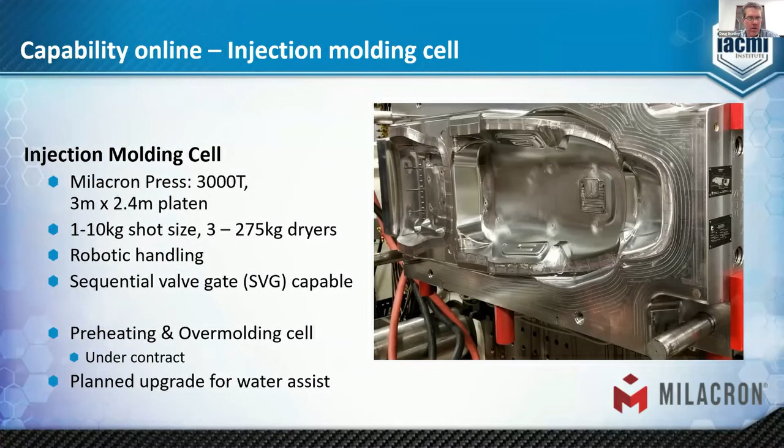We have robotic handling to unload and load the back of the machine, as well as sequential valve gates, which control the flow of material into the tool. There's also some capability that's planned to be installed, under contract now, for preheating blanks and an overmolding cell. There's also a planned upgrade on this piece of equipment for water assist, so you can do hollow parts. Another Shane who works here is in charge of that, so he's heading that up.

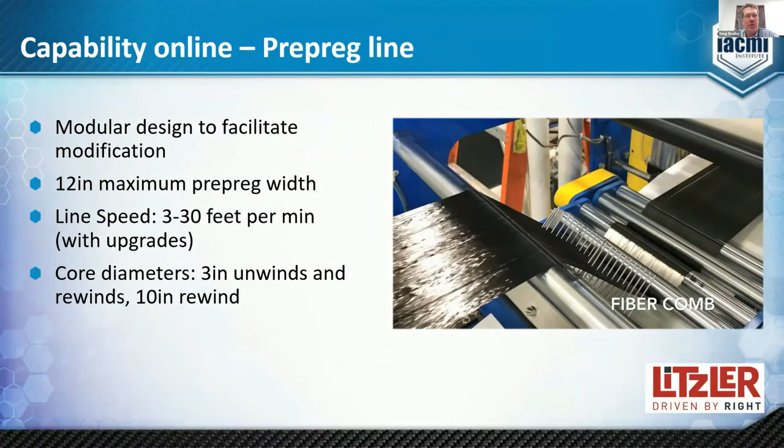Pre-preg line capability, we have a small 12-inch wide pilot line, with line speeds of 3 to 30 feet per minute. Typically what we've done here for material suppliers is epoxy development, a lot of the snap cure type systems, and that's another piece of equipment that could be utilized.

The high pressure RTM machine is integrated into the Schuler. It typically infuses a cavity, depending on your tool size, in about 15 seconds, compared to traditional RTM, which takes about 20 minutes depending on part size. It can also be used for liquid compression molding, where you're robotically dispensing resin over top of a preform and then shuttling that into the press.

This piece was commissioned June of 2019, and we've run a couple different projects on it. It's capable of epoxies and urethanes both. Traditionally here we've stuck with the epoxies, but we've got a project that will be moving into urethane systems here in the next little bit. It's tied into ventilation systems in case of running some more exotic materials. It also has mix-on-the-fly adjustment, with the ability to tailor two streams on the side along with your A and B ratios, so for IMR, pigment, or varying catalysts on the fly.

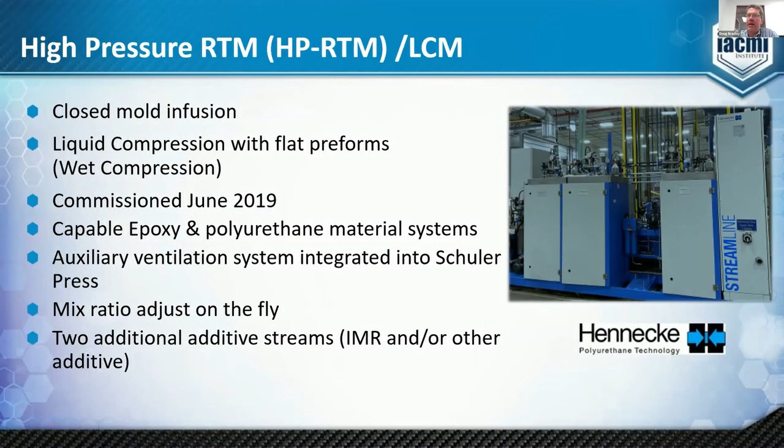Two other pieces that I'll quickly mention: we have this piece, which is a 32 millimeter twin screw compounder. It's actually owned by Ford, but we have an agreement to use it with them—they've consigned it with us.

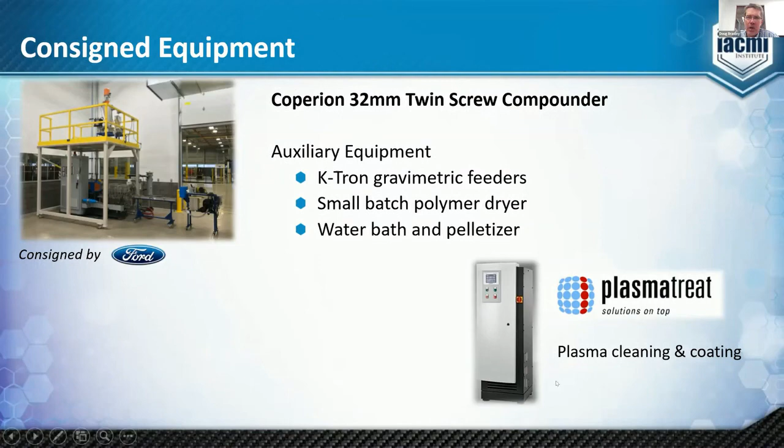We also have Plasmatreat in our facility that can be used for various different studies. In complement to support all those things, we really don't get too heavy into the analytical chemistry side of things, only more from the side of process control and QC checks. We have some FTIR, DSC, DMA, and you saw some of my photomicrographs that I took earlier. We also do some basic trimming, cutting, grinding, and have a controlled lab where we do a lot of humidity control for pre-preg kind of work.

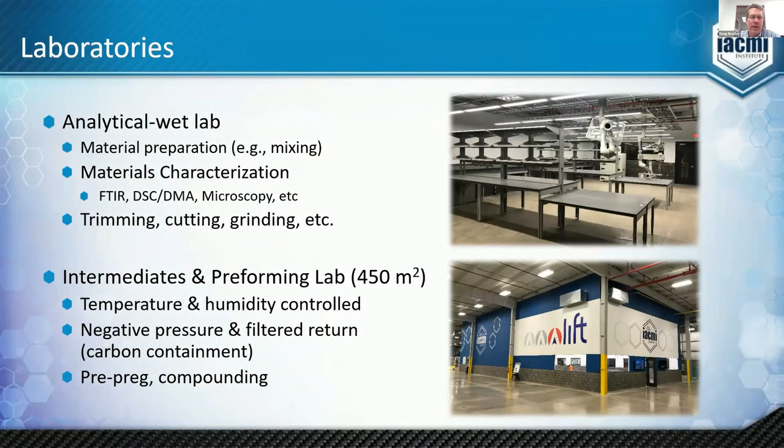That pretty much summarizes what I had to go through, giving you an overview of some capability we have here in our lab, and I really appreciate the opportunity.